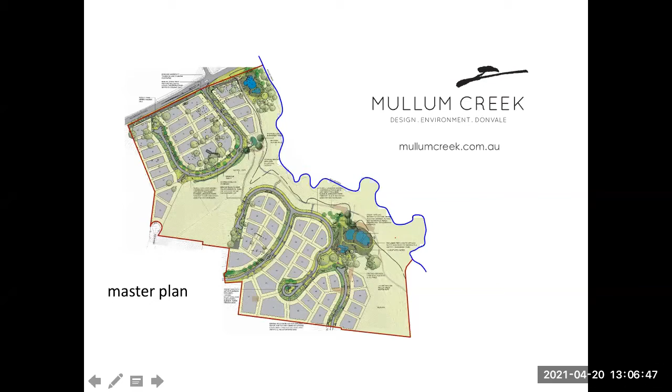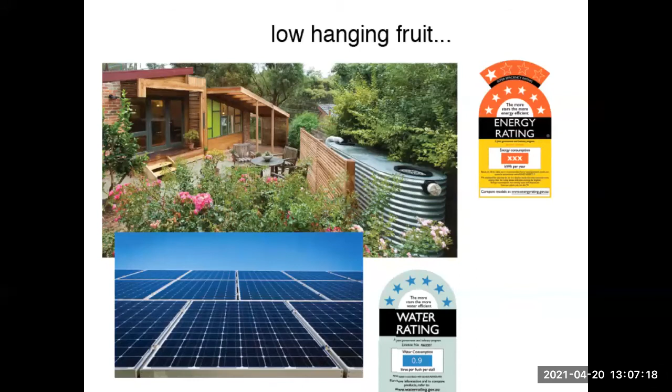Now, Mullum Creek's taken all those obvious sustainability initiatives, like requiring for each house a minimum 7.5 star NatHERS energy rating, 4 kilowatt rooftop solar power installation, a 20 kilolitre rainwater storage, and water conserving plumbing fixtures. So things you might hear of on other projects as well. But our job here was to draw positive environmental outcomes from the project that also go well beyond and address weaknesses in what was generally considered to be the best practice sustainable development at that time, so in the early noughties.

Both in early project framing, in preparation of environmental design and construction guidelines that are tied contractually to the purchase of lots, as well as through formal step-by-step design reviews and construction overview, we were able to steer some 42 lot owners, 38 architects and designers, as well as 29 building and landscape contractors to a range of environmentally sensitive practices they'd not encountered before. And what we learned, we've been desperate to share widely via the Mullum Creek website, through magazine articles, particularly Sanctuary and Renew magazines, and in presentations like this one.

Okay, so action prong number 1 in addressing our climate and biodiversity emergency. Certainly, the focus of the World Green Building Council until last year, and the Green Building Council of Australia, Victoria's Design Matters, and many other organisations to this day, their focus has been on improving the operational energy efficiency of buildings, so towards achieving net zero operational carbon, as that relates to thermal performance, as well as the efficiency of fixed mechanical and electrical services and loose appliances.

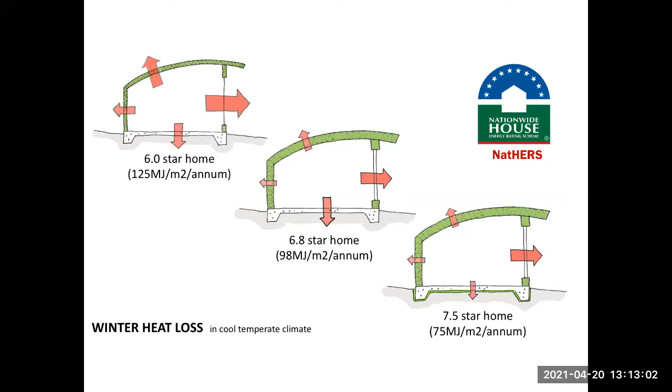I'm just going to talk about the energy rating side of the Mullum Creek project. There's 4 key elements to Mullum Creek's approach. So as Paul said, there's a 7.5-star minimum. Now this is a sensible, sustainable and forward-looking goal, and 7.5 stars almost halves the energy requirements of a 6-star house. The use of only one energy rater, as Paul says, who's independent, competent and rigorous, I think that gives good consistency in the rating approach.

The use of AccuRate. So AccuRate was chosen as the software to do all the house energy ratings on the estate. AccuRate is the gold standard, developed and maintained by CSIRO. It's the most flexible rating software available, especially for constructions. So for example, with colours, solar absorptance has always been able to be set exactly. With other rating software, like FirstRate5, for example, up until a couple of years ago, colours could only be set to light, medium or dark, but AccuRate has always allowed solar absorptance to be set exactly. And another example is that AccuRate can model 2 eaves to a single wall. Now, no other software can do this, and this is quite useful for modelling shading accurately.

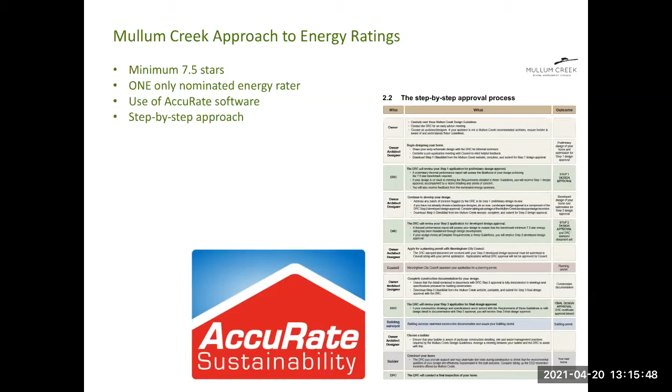So now, Paul, we'll go on to the Mullum Creek step approach. So initially, we have a step 1 stage, which is a full report on the preliminary design. So I would normally generate a detailed report with a full analysis of the house performance, and then give the required upgrade options to achieve 7.5 stars.

Step 2 is at the next stage of the design, so at a more developed design stage. And so a revised rating is done. This incorporates all the design changes to that point in time with quite a bit more detailing. It may require much of the rating to be redone, and its intent is to confirm that the 7.5 stars can still be achieved. Step 3 is the final rating on the construction plans. So again, an updated rating is produced, and this is used for the building permit and for the creation of the NatHERS certificate.

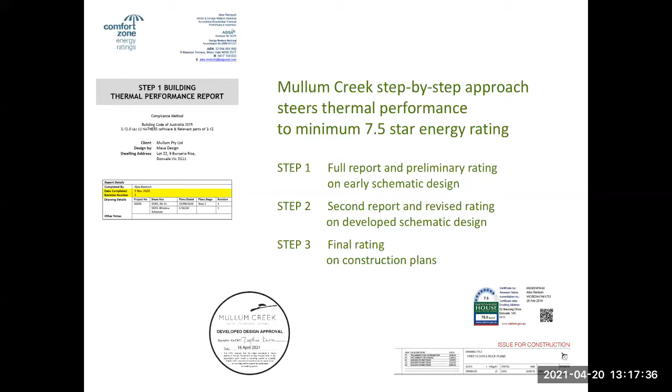Now, this step approach, the three-step approach, is probably unique, but maybe it's the way that all ratings should be done. Many ratings now involve at least two stages where you do an initial rating, give a report, and then do a final rating. But the early involvement in the design process and then the ongoing interaction and feedback is very useful in getting a high performance house.

So the key factors in achieving 7.5 stars. First, we've got the house size and shape. So in terms of size, an area of around 200 square meters or less is optimal. And people may not know, but all rating software applies an increasing penalty to houses over 200 square meters to discourage the building of very large houses with high energy consumption. Houses under 200 square meters receive a bonus. Mullum Creek houses are mostly larger than 200 square meters, and the designs can be up to 400 to 500 square meters in size. So they can be quite substantial houses.

In terms of the shape, rectangular, single or double story is the most efficient design shape. Most Mullum Creek houses are architect designed with interesting but complex design features. They're often multi-story or split level and can have unusual footprints with extended wall areas due to articulation in the design. So we've had houses that have had U-shape footprints, square W footprints, even V-shape footprints. Now, all these sorts of designs lead to larger wall areas, and larger wall areas relative to the floor area increase the potential for heat loss and heat gain. And that all makes it harder to get to 7.5 stars.

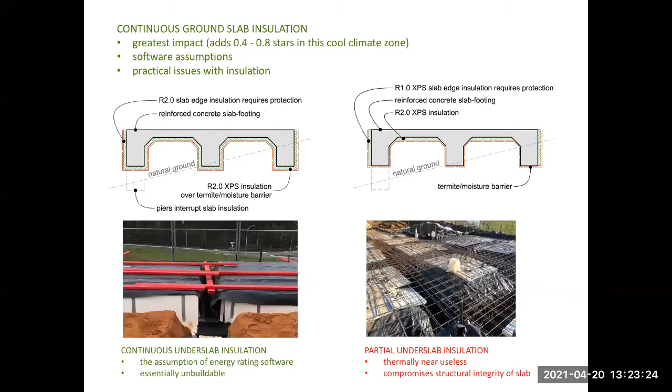Raft type slabs have got stiffening and reinforcing beams that are not normally insulated. And so under slab insulation is typically only installed to the flat underside areas of the slab. In practice, this means that as much as 30% or more of the slab is not insulated. This can have a serious impact on the rating, and we've tested this, so in fact it can be 0.3 to 0.5 stars lower. The Mullum Creek Ground Slab Insulation Guide was written to provide advice and suggested alternatives because of this.

Thermal mass is beneficial for difficult houses, and it can add 0.2 to 0.4 stars to the rating. Thermal mass acts as a heat sink and helps to moderate internal temperatures by reducing temperature extremes. So we can use options like bare concrete floors, reverse brick veneer walls, internal masonry. These things all add internal thermal mass and they can benefit the rating.

So bare concrete floors in particular, because the concrete floor is substantial. If we have floor coverings, that restricts access to the mass of the floor. So often these houses can have bare concrete floors in the living areas or even in the bedrooms. It's a design feature and some people have chosen to go that way.

Colours of external walls, roofs, doors and window frames all affect the rating, and they have to be modelled accurately under NatHERS rules. So for example, we can model the window frame colour, and dark window frames can add 0.1 stars in the cool Victorian climate.

Reflective wall wrap. Due to condensation issues in colder climates, vapour permeable or breathable wall wrap is now commonly used. But this is usually non-reflective, but reflective breathable wall wrap is available, and this can add 0.1 stars. So this is another option for getting up to that 7.5 star mark.

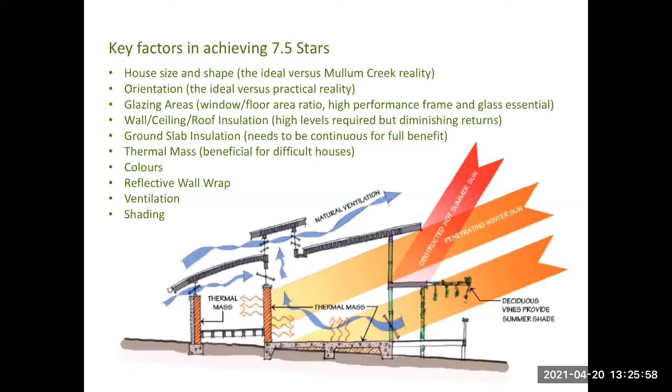So at Mullum Creek, once construction was underway on home sites, we provided owners with a free inspection service to ensure that the thermal performance that was designed into a home was carried through to the final constructed outcome. Both energy assessments and construction overview were generously funded by the developer family.

As Alex mentioned, constructing an on-ground concrete floor with continuous under-slab insulation, so to provide both good uninterrupted thermal resistance and internally accessible thermal mass, it's really challenging, it's potentially expensive, and it's a practice that's generally unfamiliar to the Australian home building industry.

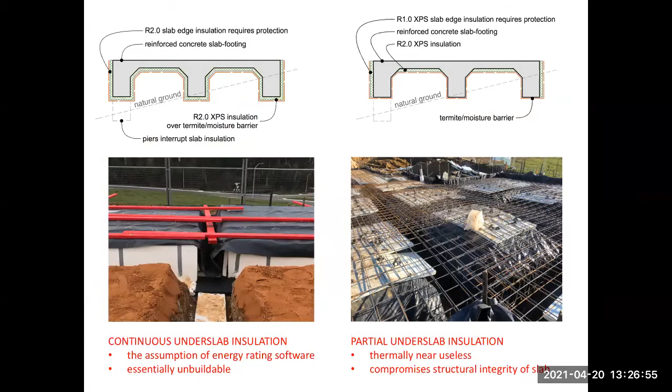Mullum Creek designers and engineers were most able to wrap their heads around continuous ground floor insulation when they were insulating over the structural slab with minimum R2 XPS insulation, as Alex mentioned, and then pouring another concrete screed over that if the client was after a honed concrete floor finish. Or alternatively, they could lay timber strip flooring over a batten cavity, and that batten cavity was insulated with minimum R2 high density polyester or earth-wool batts.

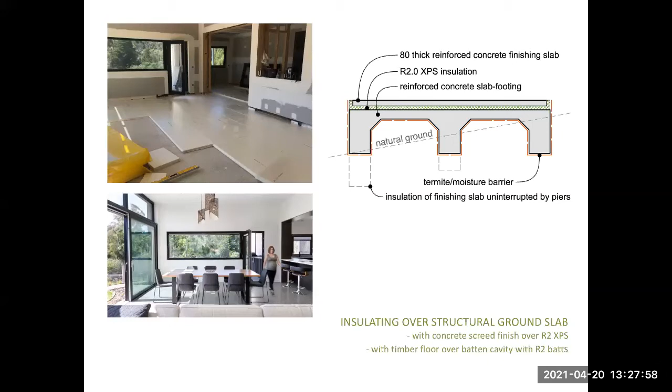But the thermal mass of the concrete structural slab would be largely lost in that process because it wouldn't be available to the interior of the building. But that concrete screed over structural slab option, that's really quite expensive to construct, and it's wasteful of concrete and reinforcing steel. So we advanced some leaner solutions through our ground slab insulation guide that you'll find on the Mullum Creek website. It includes construction details that are being successfully implemented on the estate.

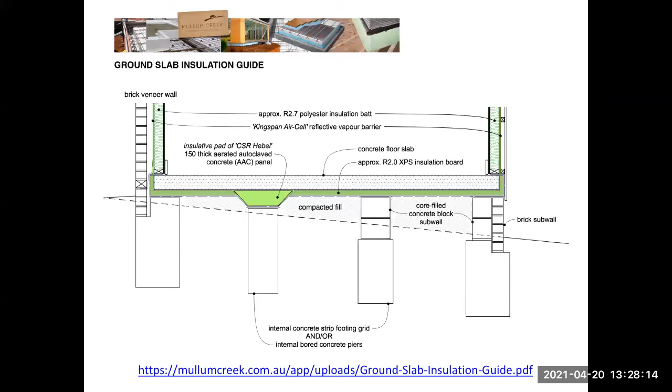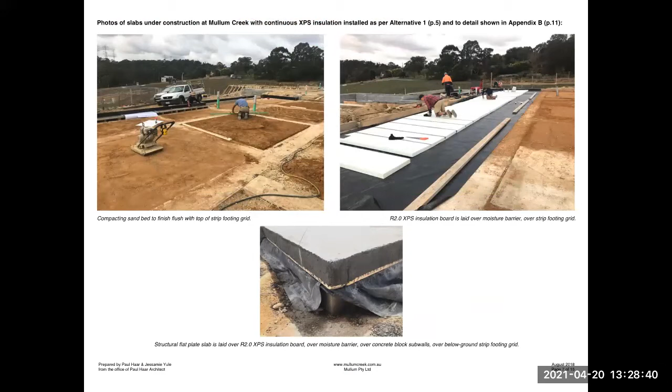If regulatory bodies want to raise the thermal performance of new homes in cool climates much beyond the currently mandated 6 stars, I think they'll need to first include in the NCC, the National Construction Code, new practical default design solutions for continuously insulated ground slabs so that they can support this raising of the bar.

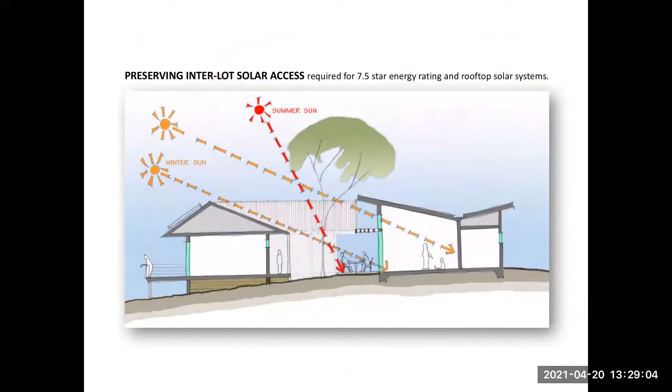Now, Mullum Creek recognises that, certainly in southern parts of Australia, high home energy ratings and rooftop solar power systems are crucially reliant on good access to low winter sunlight between residential lots. To that end, we modelled and prescribed 3D building and vegetation envelopes that were necessarily specific to each lot on this hilly estate, and inside which all construction and new planted trees needed to be contained.

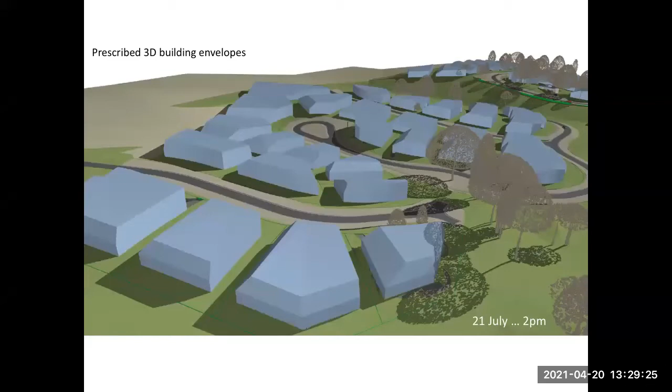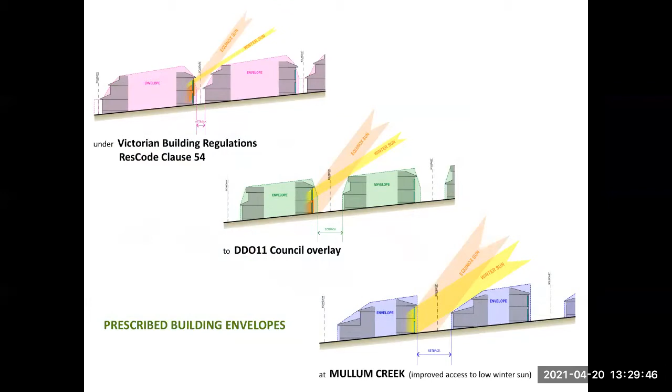Unlike standards that apply via planning codes and overlays to other housing developments in cooler climate zones of Australia, these Mullum Creek envelopes preserve full interlot solar access for each home, even in the depths of winter. We simply placed dwelling forms as they were submitted to us for design review into their prescribed envelopes on the terrain of our 3D CAD master file.

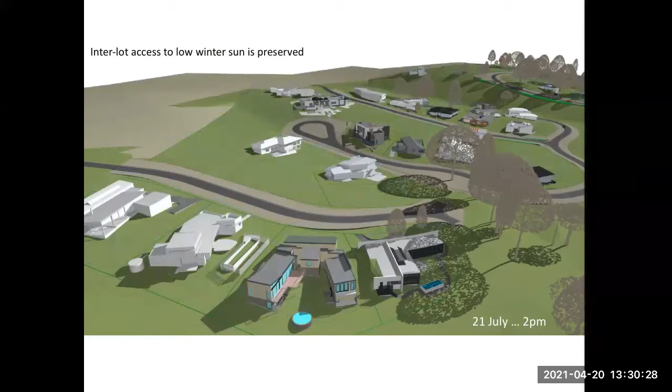An evolving estate master model that was posted and regularly updated on the project website provided everyone, lot owners and their architects, neighbours and council, web surfers, and of course us as the Design Review Committee, an up-to-date virtual estate navigator tool for exploring view lines, shadow lines, and how all homes on the estate were emerging well ahead of construction commencing.

Okay, so what about building materials, our action prong 2 in addressing the climate and biodiversity emergency before us? A report was tabled at the World Economic Forum in Davos in 2018 that put the world's consumption of materials at above 100 billion tonnes a year. And that's quadrupled since 1970, whilst population around the planet in that period only doubled.

Between 2016 and 2018, so just 2 years, this consumption had jumped by more than 8%, yet the reuse of materials had fallen from 9.1% to 8.6%. The CEO of Circle Economy, Harald Friedl, who tabled the report, had this to say: "We risk global disaster if we continue to treat the world's resources as if they were limitless."

Now, a lion's share of these consumed materials, nearly 40%, is turned into houses alone. The World Green Building Council also tells us that of all global carbon emissions attributable to the built environment, 28% are embodied mainly in the procurement of materials.

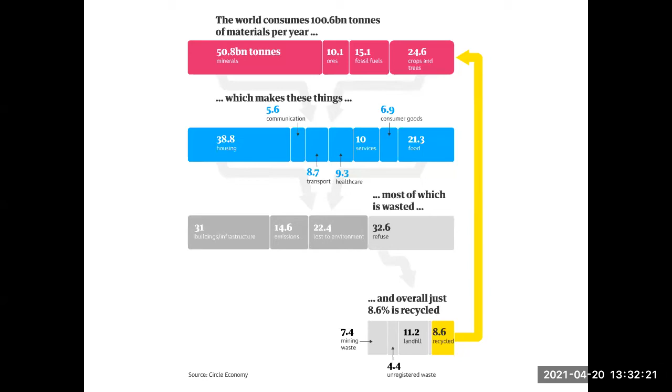There are no clear figures for Australia, but from eTool outputs and the work of André Stephan and Robert Crawford at Melbourne Uni, I'd like to suggest that the ratio between embodied carbon and operational carbon in Australian building stock is actually much higher than the global average. And that's because the floor area attributable to each occupant in our homes and workplaces, as well as the volume of vacant buildings in our cities and at our holiday destinations, are higher than almost anywhere in the world.

You can note from this infographic from Stephan and Crawford that as building size per occupant increases, operational energy use increases at a lower rate comparatively, as you'd expect. We have a relatively benign climate as well, and that moderates heating and cooling loads compared to many other countries.

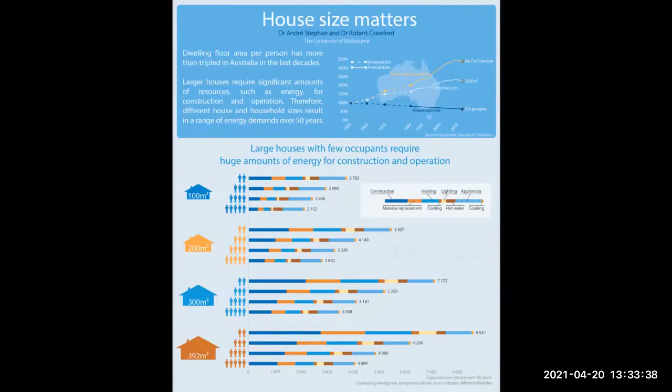And our newer habitable building stock generally has better thermal performance and appliance efficiency, and it's also better maintained than that in much of the developing world, where construction has charged forward to lower performance standards and at a blistering rate. Per square metre of floor area, it's fair to say that the operational energy and water efficiency of new housing in Australia is slowly improving.

What this means, though, is that the materials used to construct buildings remain the primary driver of the overall life cycle environmental impact of a home. So building services and appliances attached to the operation of homes can be upgraded to embrace new technologies and to provide improved energy and water efficiencies through what needs to be a long service life for a home.

You can see here what a thermal performance assessment captures. It's really just this part of this bar graph of total life cycle environmental impacts of a typical 6-star home.

And that is reduced significantly to 7.5 star, but you can see here that the overall life cycle environmental impact, which is really what we need to be looking at, has not really changed all that much. Certainly, including solar power has a compensating effect that is significant, certainly as you get higher up in the kilowatts in your installation.

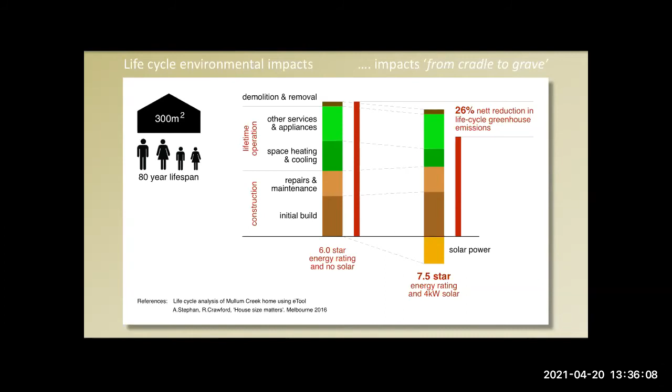If you believe the science as it's presented to us, what matters most now is how deeply and quickly we arrest CO2 emissions and biodiversity collapse. If we don't move mountains in the next 5 to 10 years, our future on this planet will be bleak. We have an acute and urgent responsibility to future generations to design buildings that are of modest scale and flexible.

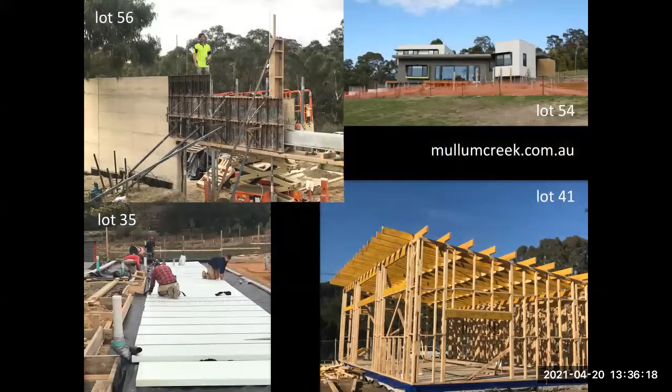Now, there are, of course, tools available to measure and verify life cycle environmental impacts, so embodied and operational impacts such as carbon emissions, water use, toxicity, ecosystem degradation from cradle to grave. There might even be some terrific ones out there. There are, but those that I've engaged with can tend to draw on inflexible assumptions about the future. They can produce quite different outputs from the same data entry, and they can result in reports of only limited benefit considering the time and the money that goes into them.

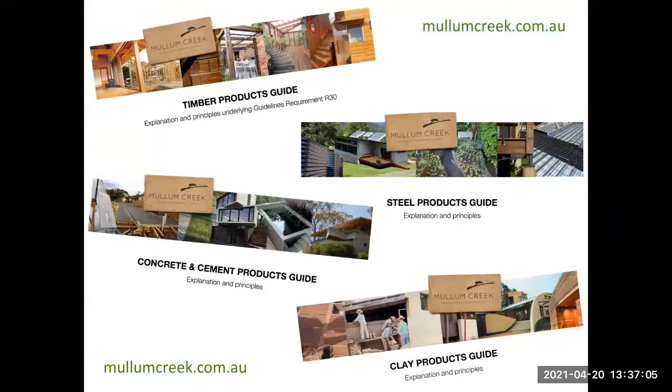So certainly we can avail ourselves of these tools, and I suspect they will get smarter over time. But in the meantime, in this climate and biodiversity emergency, we've got to respond to the simple truth, and that's that cement and concrete products, steel, fired clay products, timber, and swimming pools are currently the most impacting materials to be locked into our homes as they rise from the ground. So a couple of thumbnail sums and a good dose of critical and future thinking go a long way in guiding our material specifications towards environmental and social responsibility.

For Mullum Creek, we prepared a series of materials info sheets that attach to the estate's design guidelines and direct lot owners, designers and builders to materials with relatively low environmental impact. We did that either by formal requirement, in the case of timber, cement and concrete, or by informal recommendation with steel and clay products, for example. These guides and info sheets are all freely available on the Mullum Creek website, and I encourage you to have a good look through there if you can.

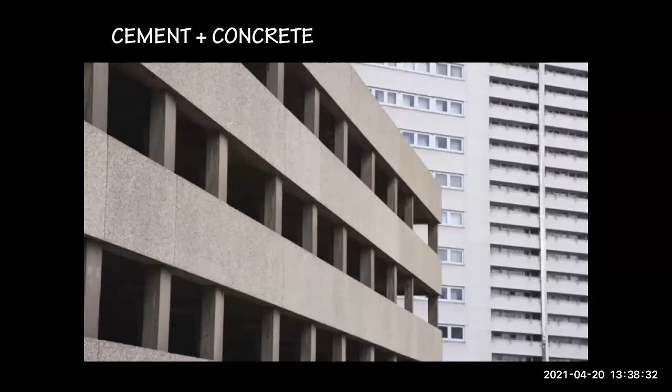Let's start with cement and concrete. The World Green Building Council tells us that the manufacture of Portland cement for concrete accounts for a whopping 8% of the planet's greenhouse gas emissions, so roughly the same globally as the entire transport sector. But there are alternative, equally effective and readily available concrete binders, such as fly ash, which is a waste from coal-fired power generation, and slag, which is a byproduct from steel smelting. These alternative binders are collectively referred to as supplementary cementitious materials, or SCMs.

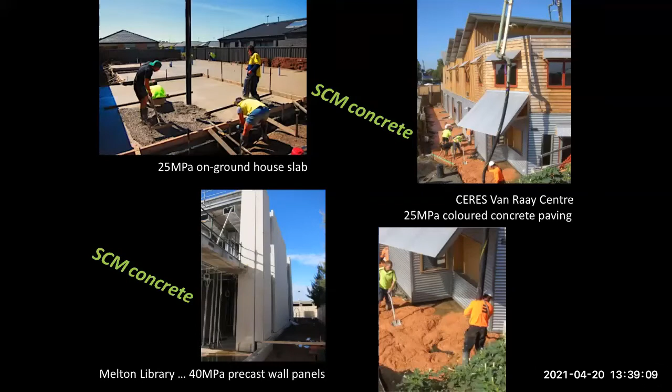Across the Mullum Creek estate, it's required that a minimum 30% of Portland cement used in concrete, mortar and rammed earth walling be substituted with SCMs. These alternatives for wet mix concrete, as well as for bagged cement, are now readily available at most batching plants and hardware stores, certainly across our major cities.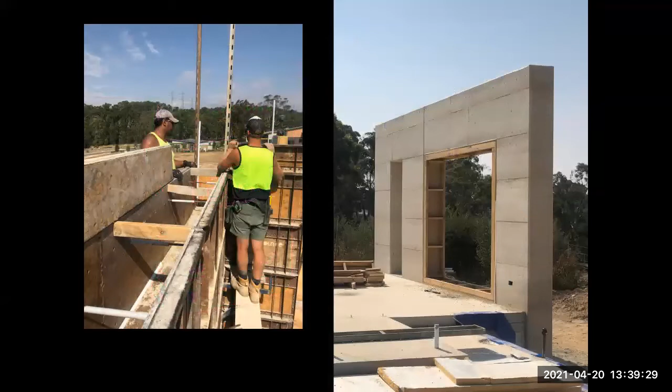Last year I was on the phone with a bright young architect, Rodrigo Roca. He recalled someone, I think it was from Austria, telling him that rammed earth in Australia is not rammed earth, but rather dirty concrete. And he was right. There's certainly nothing environmentally responsible about building a 350mm thick rammed earth wall containing 10% Portland cement by volume. The wet mix for casting a 190 thick hollow concrete block contains only 14% Portland cement. There's a lot less volume in material there.

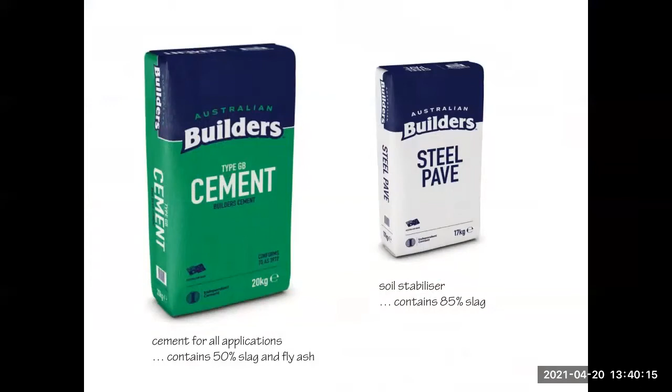For earth wall construction and soil stabilisation, the use of binders like Australian Builders Steel Pave, being 85% white slag, also avoids the need for Portland cement. Slag performs just as well as a cementitious material without reducing those nice earthy wall colours to a drab grey, which Portland cement does.

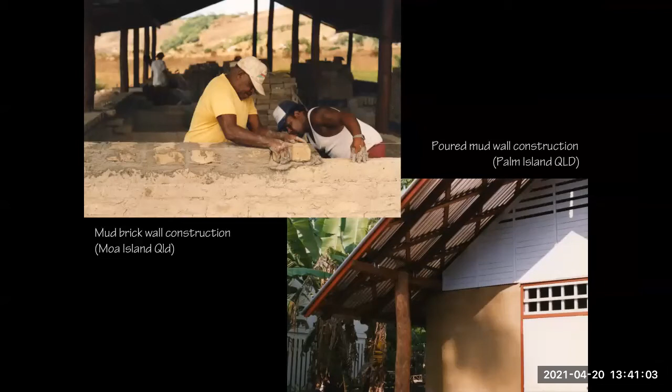When I was a young bloke, we built a lot with rammed earth and puddled mud. We put effort into selecting and blending aggregate with the right gradation of particle size and colloidal content to achieve good strength and weatherability without the need for cement. We followed the CSIRO National Building Technology Centre's Bulletin 5 on earth wall construction, and we did the old-fashioned thing of erecting test panels before proceeding with each build.

The Mullum Creek design guidelines require that SCM make up a minimum 30% of the cement used in wet mix structural concrete, and some architects and builders have chosen to increase that to up to around 60% where surface finish is not so critical. As construction commenced on the estate, we found that more and more local batching plants were supplying concrete with SCMs with no increase to supply cost.

In time, it should actually be considerably cheaper because slag and fly ash are problematic industrial wastes that are otherwise expensive to dispose of. Initial resistance to SCMs had subsided on site as concreters found ground slabs containing SCMs were actually stronger with less shrinkage cracking, and as shotcrete sprayers learnt not to add water so liberally to adjust the workability of the SCM mix they had on site.

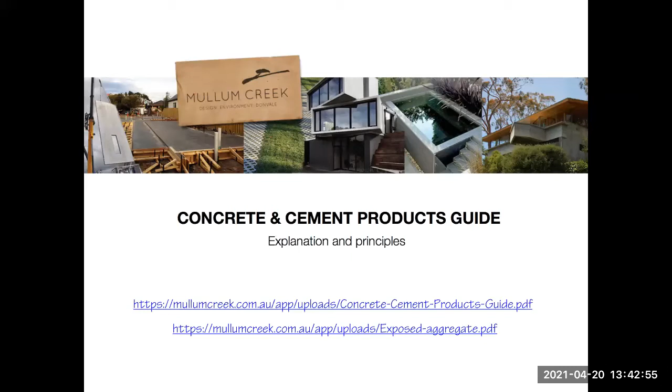And bricklayers and rammed earth wall contractors realised that bagged cement containing 50% SCM, Australian Builders Eco Blend, was equivalent to general purpose Portland cement in both performance and price. So to massively reduce carbon footprint embedded in your builds with a no-cost no-brainer, I'd strongly encourage you to specify concrete and cement with SCMs in lieu of Portland cement. And you can refer to the Mullum Creek Concrete and Cement Products Guide to make it a complete cinch.

These days, we're going further and further afield to source virgin rock and sand for concrete. The sand can't be weathered and rounded in the way beach and desert sands are. It needs to be angular to create a good structural matrix. And so it's surface mined from recent sedimentary deposits that lie beneath often delicate natural landscapes. Globally, it's acknowledged that we're about to simply run out of virgin angular sand.

And so R&D for recycling our gigantic hard waste streams to produce both coarse and fine aggregate for concrete needs to ramp up urgently. And as it does, we building professionals need to promptly preference these recycled products via our concrete specifications.

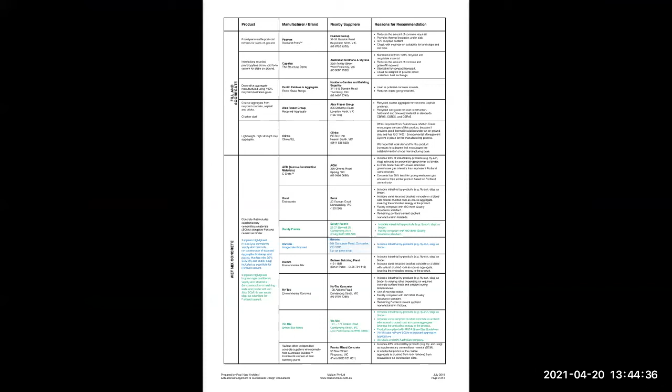So by referring to the Mullum Creek Concrete and Cement Products Guide, you can find out who batches concrete with SCMs. ACM E-Crete and Wagner's EFC contain geopolymers that activate SCMs to avoid the use of Portland cement altogether. And a number of the suppliers listed also blend crushed concrete in with the aggregate mix, certainly for lower MPa mixes, and they can source coarse aggregate crushed from rock that's removed from excavations on construction sites. All these initiatives lower the embodied carbon and biodiversity impacts of wet mix concrete significantly.

Now, fired clay bricks are back in vogue. Austral Bricks have a small brick making plant at Longford in Tasmania that uses mostly sawdust from local sawmills to fire its kilns. To my knowledge, apart from the few bricks that are produced there, it's a small plant, we're looking across Australia at around 660 megajoules of gas to produce solid fired clay bricks for 1 square metre of single skin brickwork. For the same 1 square metre of 90 millimetre thick solid concrete blockwork, it's only 240 megajoules.

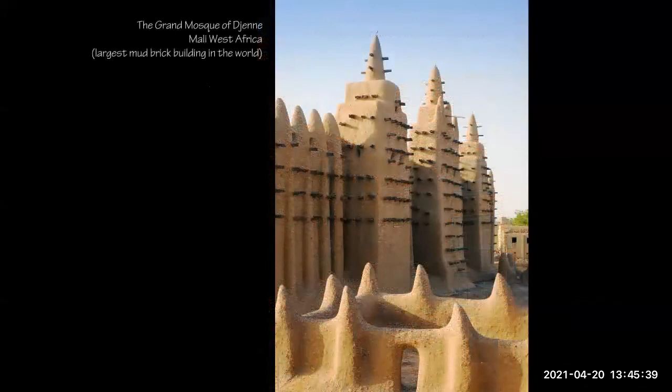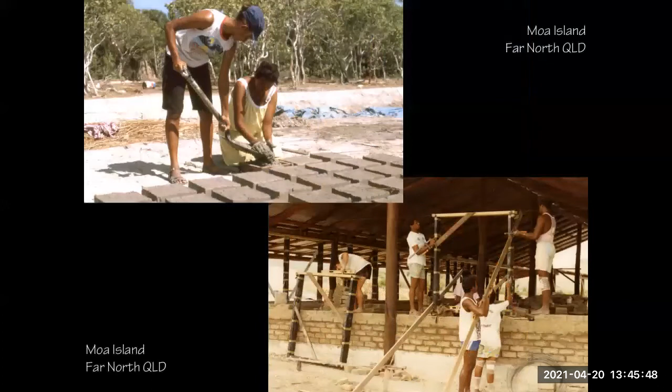So in this emergency, until we can decarbonise the bulk of this very energy intensive industry that produces fired clay bricks, we need to use recycled bricks or other wall cladding materials where we can. And we might look once again to sun-baked mud bricks. They're actually not in vogue at the moment, but with good QA in manufacture and climate conscious architectural detailing, sun-baked mud bricks can be laid as tall and as weather resistant as rammed earth and other masonry and monolithic wall systems.

We could easily refine this very simple, environmentally benign and socially inclusive construction method for a 21st century revival. These photos are from one of several community self-build projects that had me living and working up north through the 1980s and early 90s.

What about steel? We're told that the manufacture of steel accounts for another crazy 8% of the planet's greenhouse gas emissions. I think there's nothing wrong with a sheet of corrugated iron. Coated steel wall and roof cladding provides an expanse of robust and almost maintenance-free cover that's difficult to surpass at less than 0.5 millimetre of material thickness.

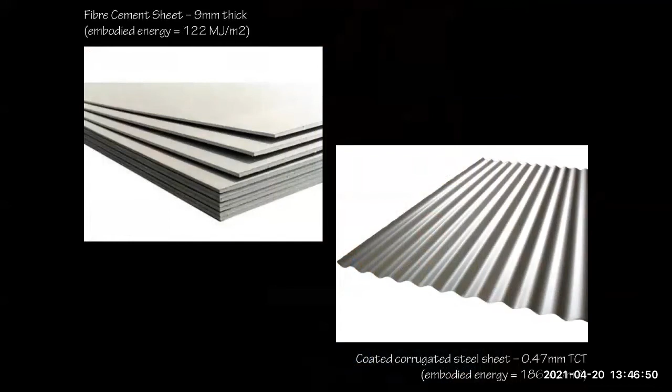But per unit volume, the carbon footprint of steel is staggeringly high compared to all other common building materials, including aluminium. You can see here how 9 millimetre thick fibre cement sheet, which normally contains around 40% plantation wood fibre, has an embodied energy significantly below that of only 0.5 millimetre thick coated steel sheet.

And check out the embodied energy of just 2 sheets of light SL82 steel reinforcing mesh in a 120mm thick concrete slab on ground. It's about the same as the embodied energy in the concrete itself. So here it's 20 MPa concrete with only Portland cement as its binder. When 40% of Portland cement is substituted with SCM, the light steel reinforcement ends up having the more dominant carbon

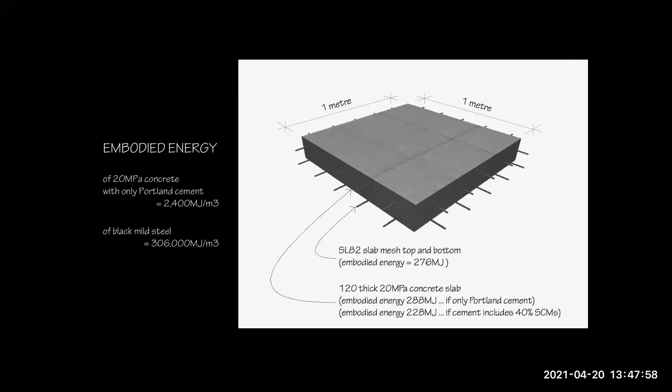footprint. So in volumetric measure, you can see here the extraordinary carbon footprint of virgin steel that's smelted from iron ore with heat from coal, certainly in Australia. Reducing the amount of weighty steel in construction is one of the best ways to minimise embodied carbon. In too many simple structures, I see steel used where substitution with a responsibly sourced timber would have been a cost-saving no-brainer. On some building sites, it's almost obscene.

So the Mullum Creek design guidelines, they were formalised with a requirement prohibiting the use of cold-formed steel framing, but the use of hot-rolled steel, it wasn't prohibited. I learned a few years later that the Currumbin Eco Village in Queensland prohibited hot-rolled steel without undue resistance from designers and builders. So in retrospect, I reckon we could have done this too.

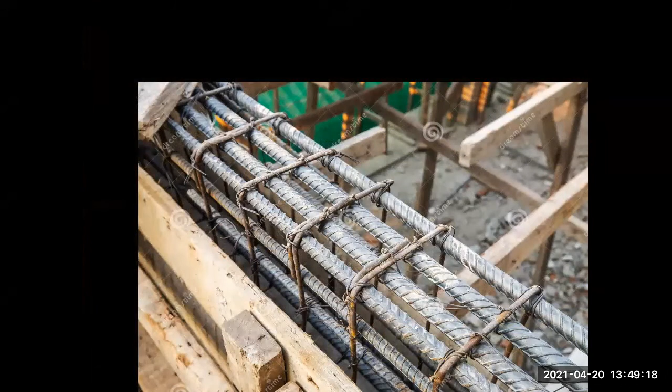Nonetheless, the Mullum Creek Steel Products Guide lists steel products that are manufactured locally via comparatively energy efficient ISO accredited processes. Look, we need to start questioning architecture on our drawing boards that relies on highly reinforced concrete and hot rolled steel to stand up. We need to ask ourselves, why such structurally demanding designs are necessary? Are we chasing building heights that are simply unsustainable?

Also by social measure? And has our architectural flair for gravity-defying cantilevers overtaken our responsibility to design light and lean in response to the emergency that we've got? What other less impacting materials could we use for these structures? You'll read it everywhere. Wood is good. Wood, the ultimate renewable, responsible wood, make it wood.

Well, contrary to popular belief and some heavy marketing, timber can be the very best or the very worst material you'll work with as a builder, depending on where and how it's sourced. If it's sourced sensitively, it can store carbon through and beyond its service life in construction. It can be reused and recycled, or it can be harvested from deliberately planted and sensitively managed forest, helping to maintain healthy ecological processes, sequestering atmospheric carbon and contributing to the social and economic well-being of rural communities.

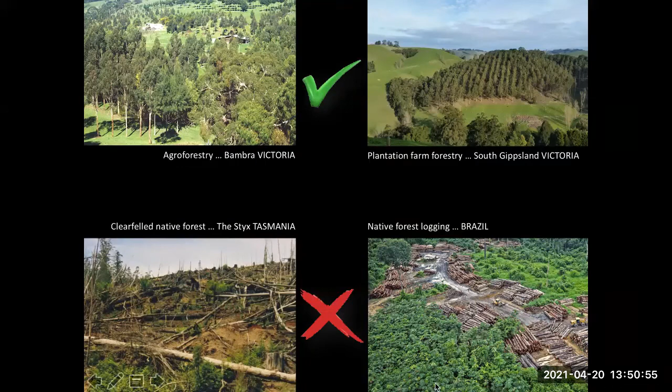But if it's harvested insensitively, it can result in serious and irreversible impacts on flora and fauna, on soil health and waterways, and it can reduce or even reverse a forest system's sequestration of atmospheric carbon, and it can erode the well-being of rural and Indigenous communities. Even before our Black Summer commenced in September 2019, deforestation was responsible for 17% of global greenhouse gas emissions.

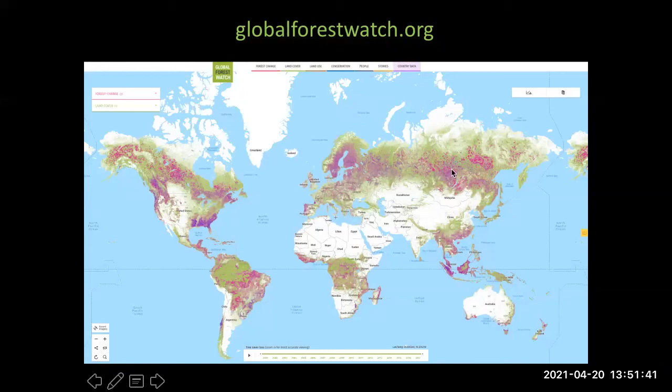Just the current rate of deforestation of Northern Hemisphere boreal forests, so that's the band you can see through the Northern Hemisphere up the top here, through Canada, Europe, Eastern Europe, and Russia, and into Siberia. It's the largest terrestrial biome on the planet, and that continued deforestation will have catastrophic impact on our global climate if it continues at anything like its current pace.

Over the past few years, our Bunnings stores have transitioned their sourcing of softwood framing timber away from fast-grown radiata pine, so from temperate climate Australian or New Zealand plantations, and towards slow-grown Baltic pine or spruce. Now, much of that imported softwood is from those boreal forests, so intact, mixed broadleaf and conifer forests of Russia and Eastern Europe. Really beautiful environments.

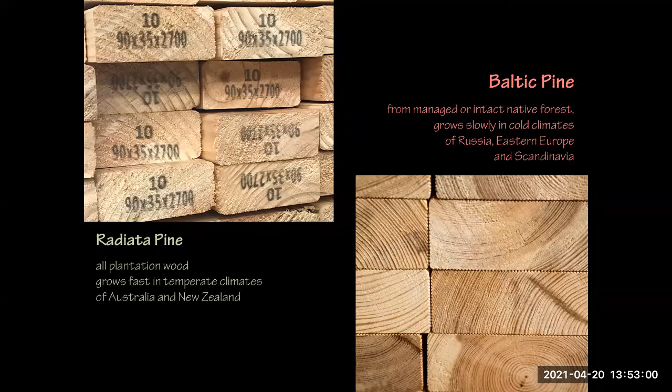Top left-hand side, you can see fast-grown, temperate climate, Australian radiata pine. You can see how quickly it's grown. The exact same size of a piece of wood, maybe between 5 and 10 years of growth in that timber section. So that's the good one to go for.

And in Australia, it's our tall and relatively intact sclerophyll forests from which the durable, stable and attractive native hardwoods for architectural applications are usually extracted. But cyclical clear felling of tall, wet sclerophyll forests in often mountainous terrain depletes biodiversity and other ecosystem services. It encourages a regrowth that's thick with ladder fuels and causes exposure-related dieback of the often lone habitat trees left standing. And that then exacerbates wildfire risk.

These damaging impacts are now compounded by a hotter and drier climate. Just over a year ago, our country's slowly rising environmental concern saw at least a good proportion of Victoria's remnant native forest protected from logging. Conveniently, though, at these times, we turn again to the tropical rainforests of poor Southeast Asian and Amazonian countries. We go there for our Kwila decks and our Merbau window joinery.

The unprecedented Australian forest fires of 2019 and 20 have highlighted the palpable reality and the inertia in our global climate and biodiversity emergency. A movement of community concern has emerged in response, and its inertia is shaping up to be equally palpable. So there's a rapidly increasing mindfulness that the preservation of biodiverse natural forests has got to be core to our emergency action, to caring for country. And seeing our native forests stressed by heat and drought like never before, specifiers and purchasers of timber products are now questioning the cross-generational ethics and the common sense in continued forest logging.

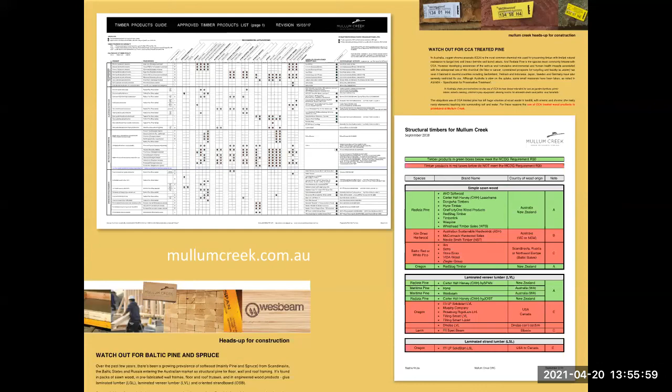So we've compiled background papers and a comprehensive list of readily available timber products that are suited to all applications and budgets. And these are regularly updated, so check them out on the website. We were really pleased and a little bit surprised how designers and particularly builders at Mullum Creek embraced with minimal resistance the timber products we required them to choose from. And we know they're now carrying this new product awareness to their other jobs.

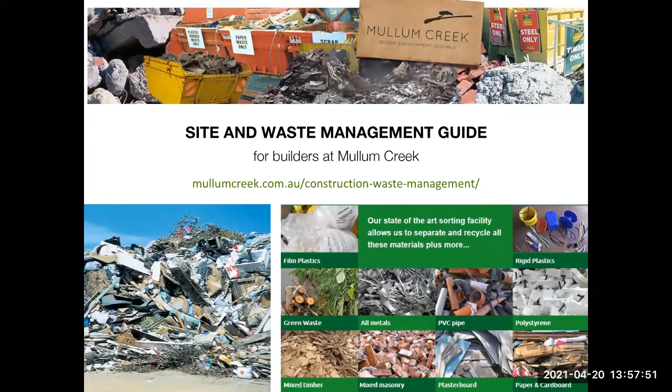Site and waste management: there's a terrific guide that my colleague Rafi prepared on site and waste management to reduce the waste that goes to landfill by 80% at the least. There are do-it-yourself options and outsourcing options to achieving those objectives.

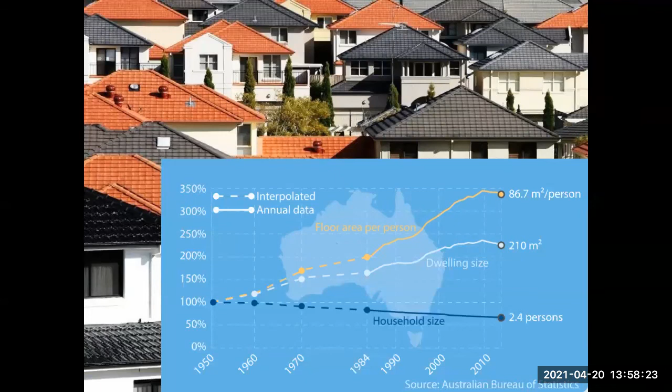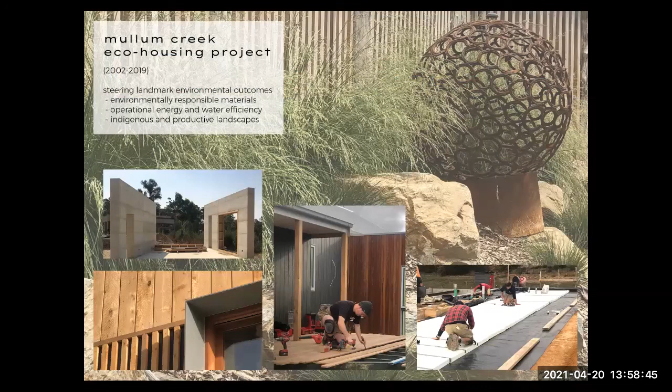So we live in an age of enlightened greed. And this was, for me, the only and really disappointing part about the Mullum Creek project: its failure to cap the scale of homes built adequately. We put things in place to a degree to do that, things like these prescribed building envelopes and limits to site coverage attached to the contract of sale. But there are some monster homes on the estate, as Alex pointed out as well.

But putting that concern about building scale aside, the Mullum Creek project certainly serves as an exemplar for site-sensitive building and landscape design. It showcases energy-efficient architecture, and it'll promote the use of environmentally responsible building materials. So things that you'll see in place on the estate. And this is a home that won last year's Design Matters National Award. It's at Mullum Creek, a beautiful home. It's not one of the monsters. So there's plenty of scope for architectural expression with a lot of this strictness about thermal performance and material selection. There's still lots of beautiful things you can do.

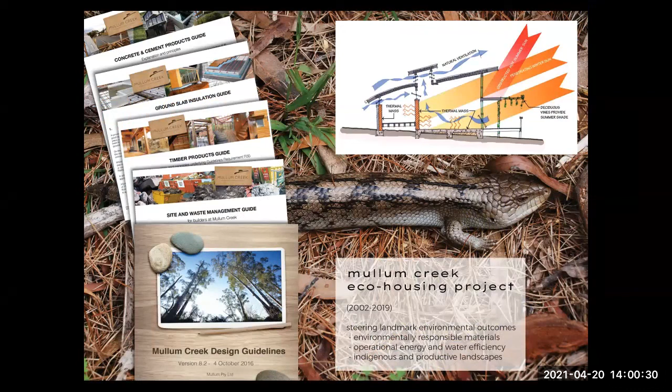And another terrific legacy of the project will be in the advancement of people. So lot owners, designers, engineers and builders who've been able to engage in the project. We were also able to publish a swag of practical guides and info sheets that I've touched on to support the implementation of these environmental initiatives. And those guides are now circulating widely, also beyond this state, as free knowledge for the commons, and you can find them on the project website at Mullum Creek.